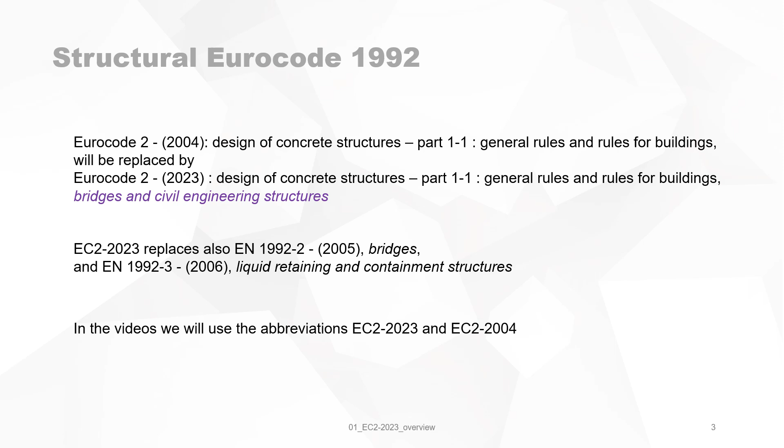Provisions specific to bridges are now grouped in Annex K of the Eurocode 2 version 2023, and the assessment of existing concrete structures is given in Annex I of Eurocode 2 2023. This was an important missing link or missing subject in the present Eurocode.

In the version of 2004, we had in total 4 parts: part 1.1, part 1.2, part 2, part 3, and that's it. In the new version 2023, we have only 3 parts: part 1.1, part 1.2 and part 4. So don't look for part 2 and 3 in Eurocode 2 because they do not exist. Part 1.1 is the same as previously; it's about general rules. Part 1.2 is structural fire design. It stays the same. When I say it stays the same, I don't mean the content, I only mean the topic stays the same.

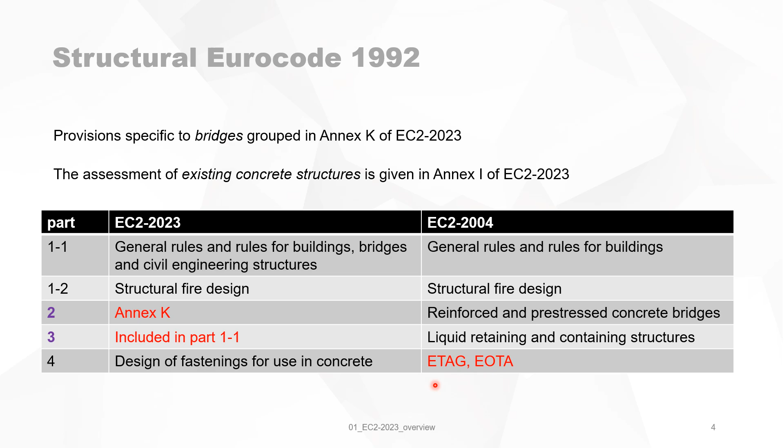Now, when we look at the different clauses, you will see that in the version of 2023 there are 14 main clauses or chapters. In the version of 2004, there were only 12 chapters. But be assured all items are covered, and we will see how it is done. So remember, this overview is only meant to help you locate the subject you are interested in. For instance, if you are used to looking in chapter 3 of the present Eurocode for material properties, you will not find it in chapter 3 of the new version. You will find it in chapter 5. That's why I give this overview, so you can locate the subject you are interested in.

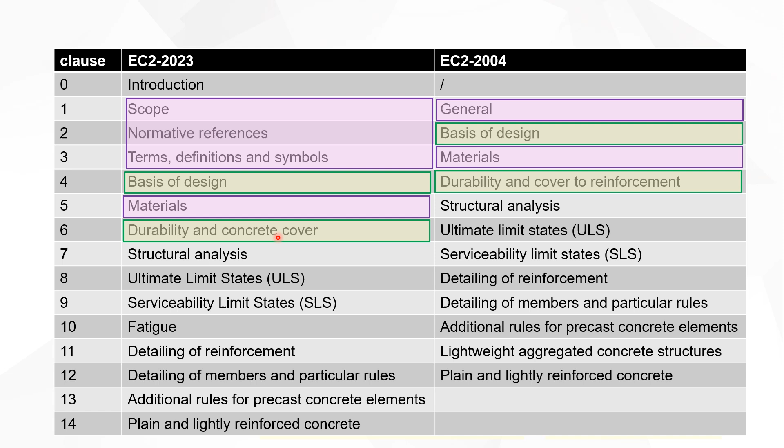So let's start. Chapter 1 of the version 2004 is now replaced by clauses 1, 2, and 3. So they have split it up. Instead of general, we now have scope, normative references, and terms, definitions, and symbols. Section 2 of the version 2004 you can now find in clause 4, which is basis of design. Materials you will now find in clause 5 instead of 3. Durability and cover to reinforcement is now clause 6 instead of 4. Structural analysis is now clause 7. Ultimate limit state is clause 8.

But in ultimate limit state, in the version of 2004, there was a chapter 6.8 dealing with fatigue. This is not in chapter 8 anymore, but moved into a separate chapter 10, which deals only with fatigue. So if you are looking for fatigue descriptions, don't look in the ultimate limit state, but go directly to clause 10. Serviceability limit state, clause 7, is now 9. Detailing of reinforcement is now clause 11. Detailing of members and particular rules is clause 12. Additional rules for precast concrete elements is now clause 13. And lightweight, plain and lightly reinforced concrete is clause 14. You will see that the previous clause 11, lightweight aggregate concrete structures, is not there anymore. It is replaced by Annex M of Eurocode 2 version 2023.

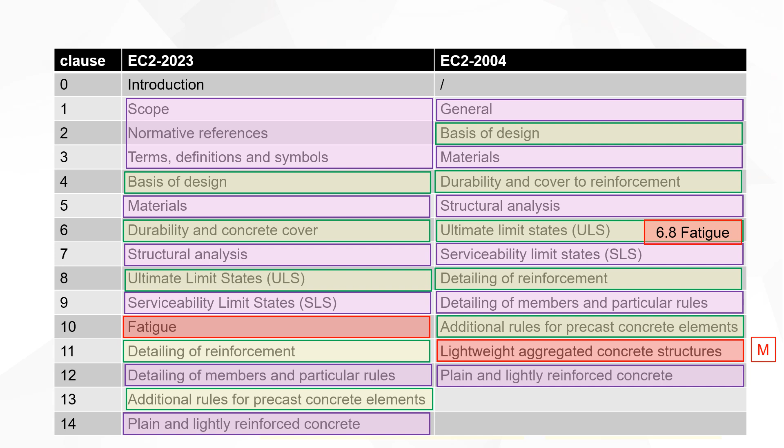There are now 19 annexes instead of 10. Annex A is more or less the same subject, not the content, of course, but only the subject. Annex B, the same subject. Annex C, more or less also the same, but Annex D is interesting. Annex D now gives an evaluation of early age and long-term cracking due to restraint, which was not previously in the Eurocode 2004. Annex E deals with additional rules for fatigue verification. Annex F, safety formats for nonlinear analysis. And Annex G deals with the design of membrane, shell, and slab elements, which is also very interesting but difficult to apply.

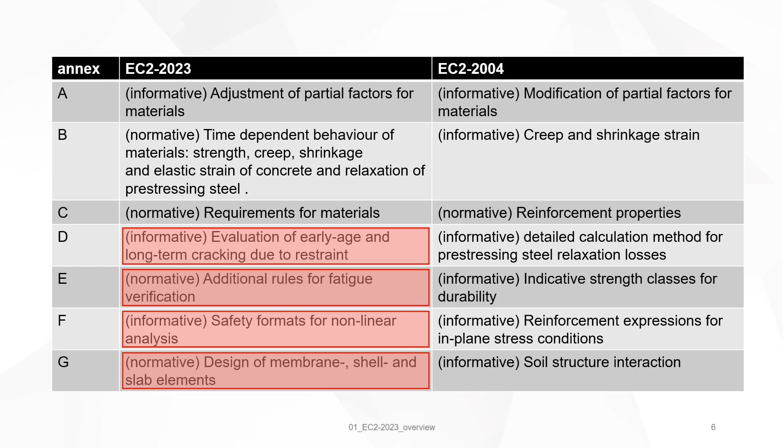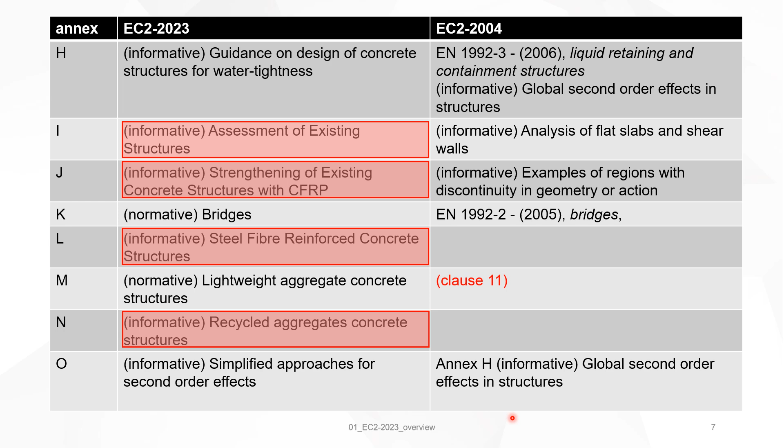Annex H, guidance on design of concrete structures for water tightness, was previously dealt with in Eurocode 2 Part 3. Annex I, assessment of existing structures, is new. Annex J, strengthening of existing concrete structures, is also new. We have seen that Annex K is for bridges, which replaces Eurocode 2 Part 2. Annex L, steel fibre reinforced concrete structures. Annex M, lightweight aggregate concrete structures, replaces clause 11 of Eurocode 2004. A new Annex N is recycled aggregates. And Annex O is simplified approaches for second order effects, which is the same as Annex H of the previous code.

Annex P is an interesting one, because in the new version of Eurocode 2 there is a new approach to design for durability with a concept like exposure resistance classes. When we do not want to use this new concept of exposure resistance classes for concrete, you can go back to Annex P, which is in fact very similar in method to the present Eurocode 2004, Section 4, Durability and Cover to Reinforcement. Annex P is very similar as a method, because the use of exposure resistance classes can be difficult to apply in practice.

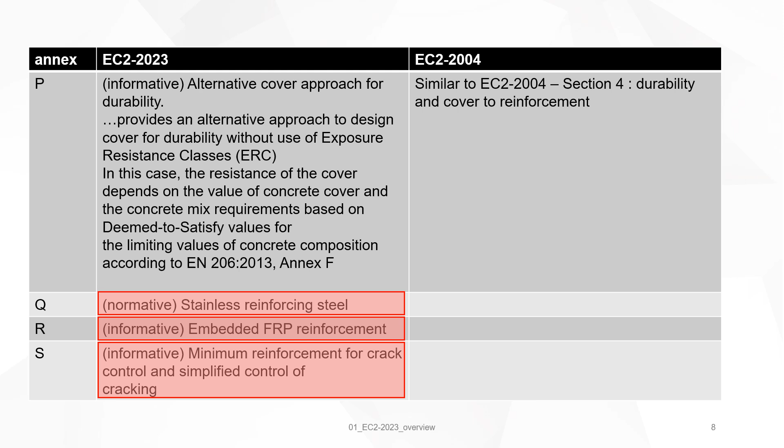Then we have Annex Q, which is new, stainless reinforcement steel; Annex R, embedded FRP reinforcement; and Annex S, which is informative and gives you some formulas for minimum reinforcement for crack control and simplified control of cracking, but it is informative.